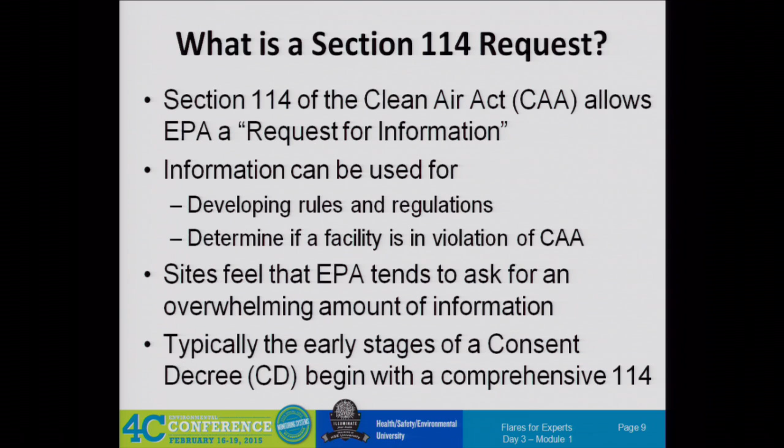We have seen sites where they submit their 114 response, and then they never hear back from the EPA. You're always wondering, are they okay with us? Were we not too bad? Did they find somebody else worse? They're looking for low-hanging fruit. Maybe you had a little bit of non-compliance, but not enough for them to expend all this energy to go after. Because they send out a lot of these, they probably found some more important facilities to go after. So there is a lot of uncertainty when you submit as to when or if you will ever get any response back from the EPA.

How to handle a 114 request. We like to say don't panic, but at the same time, don't wait. These come with a very specific 30-day time frame. That's just the standard. You'll get the letter, and it'll say, please provide all this information, and you only have 30 days. Usually there's about a week of time when everybody's just wrapping their heads around what we've just gotten in the mail.

They don't ask you, do you have a turnaround going on right now? They don't want to know that. They just know that you can drop everything and take care of this. So definitely get moving quickly. Involve lawyers. I know involving lawyers is always not a pleasant thing. But a lot of these things, especially if you have to create any calculations, or you're trying to investigate certain things, you want to be able to have that attorney-client privilege for those things that you're creating.

Pretty much look at the information being requested. They tend to fall into a couple of different categories. Usually there's a data portion of the 114 request surrounding your flare. There's a documentation piece where they want to know, give us any manuals, any design documents you have around your flare system. They're going to ask you for all your permits. They may ask you for all your permit applications. They may ask for emissions inventories.

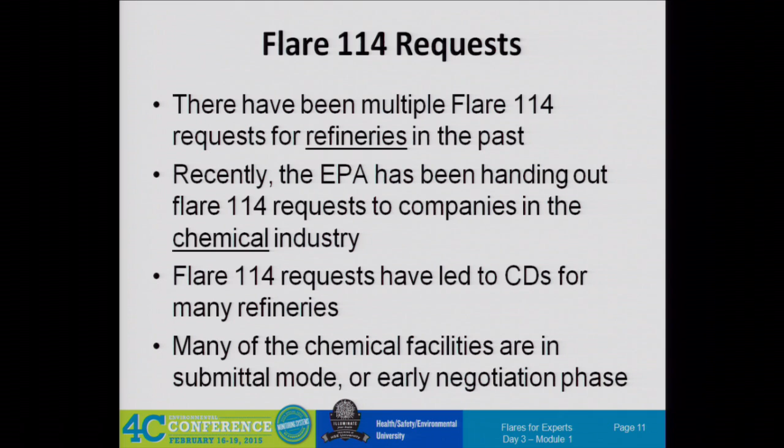Yeah, so, you know, it's moving forward.

A lot of different questions. The data side, it's pretty much verbatim between all the ones we've seen. They want to know the flow rate of the gases going to your flare. Usually it's about that 5-year window back, plus or minus. They want to know the volumetric and mass.

So if you already had like a GE Panametrics or something on your flare header, then that data is relatively easy to get. If you don't have a flow meter, you have to describe your monitoring of what you have on your flare system, and then they're going to ask for the data. If you don't have the data, they're going to ask you to estimate it. This is kind of how much work do you do to try to answer the question, because sometimes it's better to not give them information than give them poor information.

What average time do they want that data? Hourly, yeah. They will also ask for your assist rates. So if you have a flow meter on your steam, you want to get that data, but a lot of times people only have, hopefully, the valve positions for the steam in the DCS or the historian, so they could use a valve percent open to calculate steam flow. We see that a lot. But it is trying to get that data.

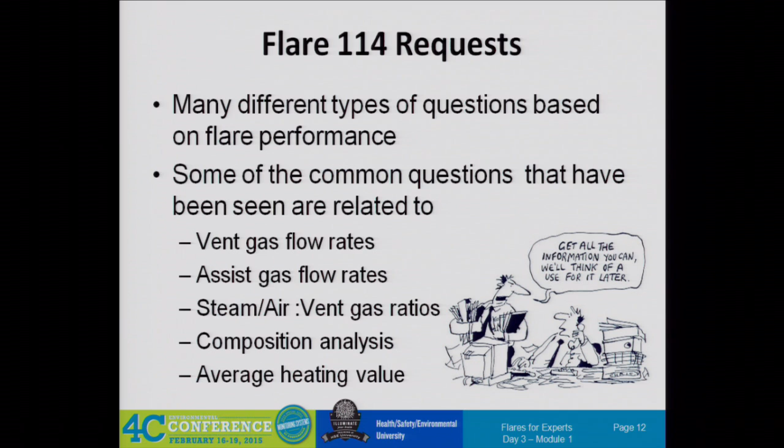The questions, they don't stop at the flares. There usually are some additional questions. Sometimes we've heard that it depends on how recently someone's been out to do an inspection of your facility. If they were out doing an inspection and they had some concerns about your tanks, there may be some tank questions in your

114. Almost consistently, they start to ask, do you have a closed vent system going to your flare? They're looking for that LDAR applicability to say, are you using that flare as the control device for LDAR? So that brought you into needing to comply with 60.18. So they want to establish what should you have been doing with your flare?

A lot of times too, and we think that it's coming from trying to justify minimization or installation of some sort of flare gas recovery, they ask for information like how much natural gas does the facility as a whole purchase, and then they ask of your fired sources, what's the fuel usage for all your fired sources at the facility. And we think they're just trying to create the argument that you've been flaring all these gases and you've been buying all this other gas. They want to be able to start that argument that, why don't you recover the gas that you're flaring and burn it instead of buying it? So they're asking for those type questions.

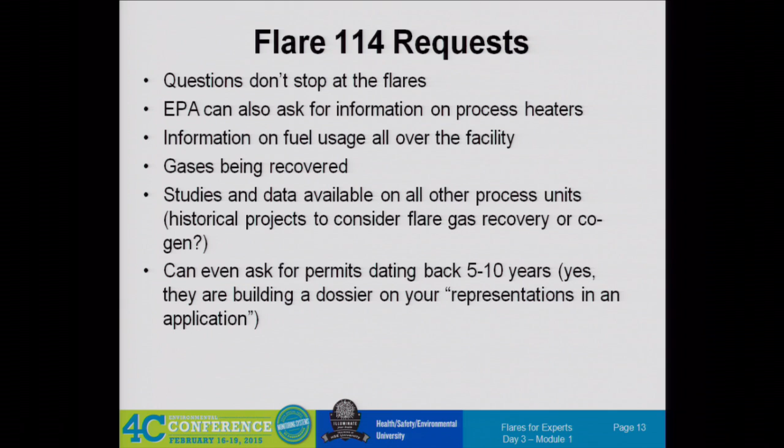Yeah, so this is a large effort. You're going to need to have some people pretty much dedicated to this effort, because you're going to have people going into the units a lot to get a lot of this information. Maybe you need to figure out what's actually going on with the flare. Or you're going to need people to go after different parts of the information. So that whole coordination of the effort to put together that single deliverable to the EPA can sometimes be a logistical nightmare with all the different data sets that you need. But there will be a lot of people involved.

Yeah, this is the other one: how do they want the data? They want you to provide the data in a nice Excel format, because they want to make it easy for them. They don't want to get a bunch of hard copies of data, so that somebody on their end would have to type all that data into Excel. They want you to set up the Excel sheet with all the columns with all the data, so it speeds up their analysis of your data. Also, any other documents they want in a searchable PDF document.

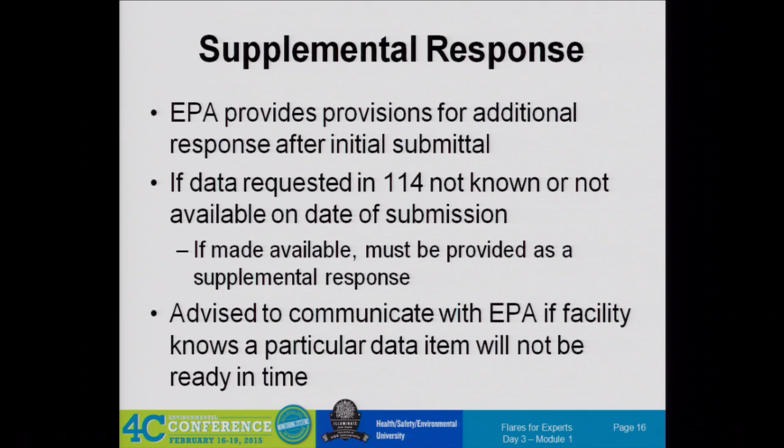Not so much. Yeah, we have seen multiple times where it's like, okay, you said that you didn't have a flow meter on your steam. It's been a year. Do you have one? It's kind of like, oh, did you guys put one in? So yes, they do want you to start making changes immediately.

We have seen, you provide some data. Sometimes there will be some very quick questions back. They got some data and they just need some quick understanding of what you gave them. They have looked at it and said, no, wait a second, is this or is this? And so some of these questions are just so they know how to handle that data. Other times they will start moving into bigger questions, sometimes asking you to now start sampling some of your flares, things of that nature. So if they take an interest, they could take a big interest in your facility.

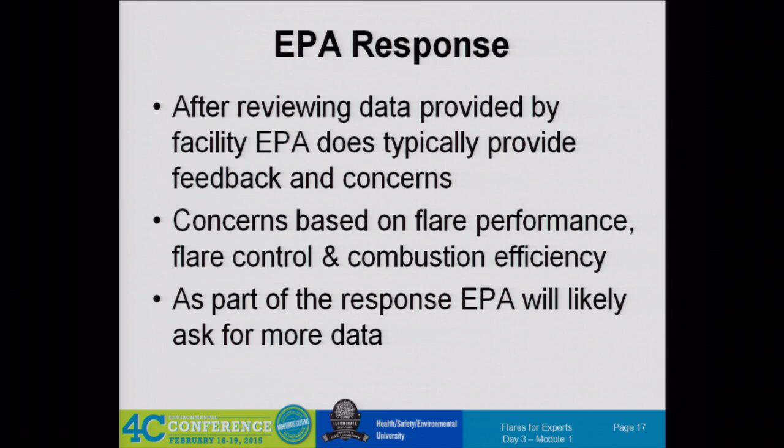And also as supplemental responses, usually when they give you a supplemental, they will ask then, please provide all the data since the last submittal. So they're going to be continuously asking for more and more data to look to see for these very changes. At least from what we've been seeing, the end game is relatively pretty much laid out. You see just within the consent decrees, we're all playing the same game but using different players. Everybody's going towards this. They want monitoring, they want control. So that end game is pretty much a given.

Now, when it comes to installing recovery and minimization assessments, that's when it's going to be a deeper dive into understanding, is it feasible? What are the issues surrounding that? But the end game with at least monitoring is relatively straightforward. And unfortunately, a lot of the time the end game is a consent decree. Other times we have seen the CAFOs come out, the consent agreement final orders. Those are generally seen as being better. But usually to be able to comply with one of those, you have already had to have started moving before they come to you. So if you're not already working up the engineering to install this monitoring and control, you're not going to be able to get done in time.

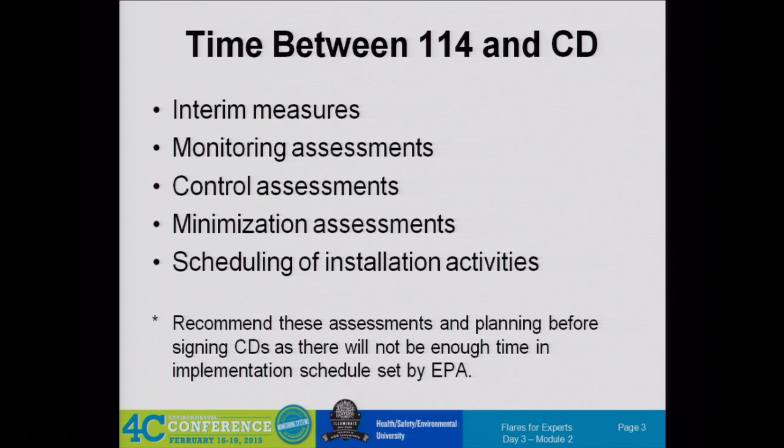Okay, I got ahead of myself.

Okay, the monitoring assessments. One of the things where we want people to try to be proactive is this: you did a 114 request and they asked for, say, composition data, and you have no composition analyzer on your flare. Now's the time to start looking at where a good place to put it is. What are the technologies? Start doing that evaluation. Are you at a site where they suddenly say, no, we hate GCs? Okay, well, what are your non-GC alternatives? Or if you say, no, we really like GCs, go and see what the options are.

Am I going to have to build a shelter for this thing? Some of those questions are some of the bigger dollar issues. So it's really about getting from what we need to actually doing the engineering studies. There are a lot of things you need to look at and evaluate, and it will help you understand what's going to drive the cost. Sometimes that's the best thing you can tell your plant manager: we've looked through all these different alternatives, and we feel that this package is going to be the lowest cost with the best data.

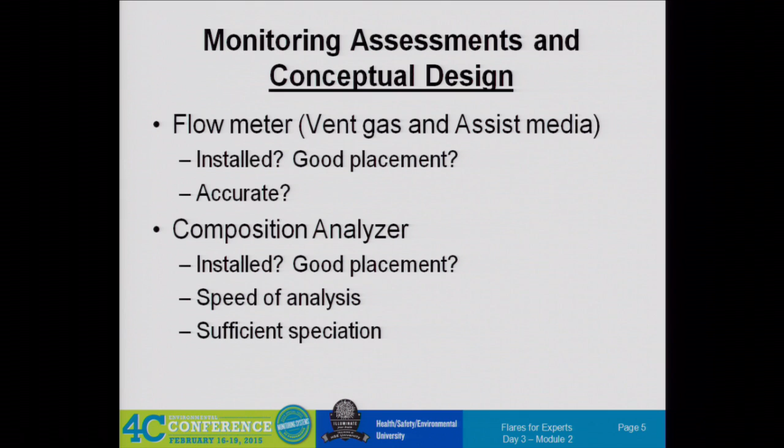Control assessments, especially steam and air. People have had these systems set up, and the question is, with the control system we have set up right now, is that going to be adequate? That's going to take some thinking about what's the quality of steam you get. Is steam going to your flare for reasons other than controlling for smoke? We've come across this at a couple of different places where sometimes the flare is the easiest place to get rid of excess steam. That's definitely something, but then of course that is another big project. So you have to think about these things holistically.

Checking out, okay, we have some ROs, we got our bypass ROs, are they still valid? Does anybody pull those things out and check to make sure? I think doing that evaluation to say that yes, that RO is sized properly and is providing that minimum cooling steam is a good thing to be able to show the operators so they can feel comfortable saying, I'm not going to burn up that tip if I turn the steam valve all the way to zero.

I think they have an uncertainty with that. We talk to the operators all the time, and you get that response of, you see the RO, you see the control valve, and they're like, oh, we always leave it at about 5% or so. We want it because we can't burn up the tip. You don't want to argue with them. We're not going to get into the details, but you're thinking to yourself, but you got an RO that should keep the tip from burning up. It's still in their mind that they got to keep that valve a little bit cracked just to keep the tip safe. So it's being able to show them, maybe somebody from their engineering group to tell them, no, you're going to be fine with just your RO. That could be a good thing for helping dial back that steam.

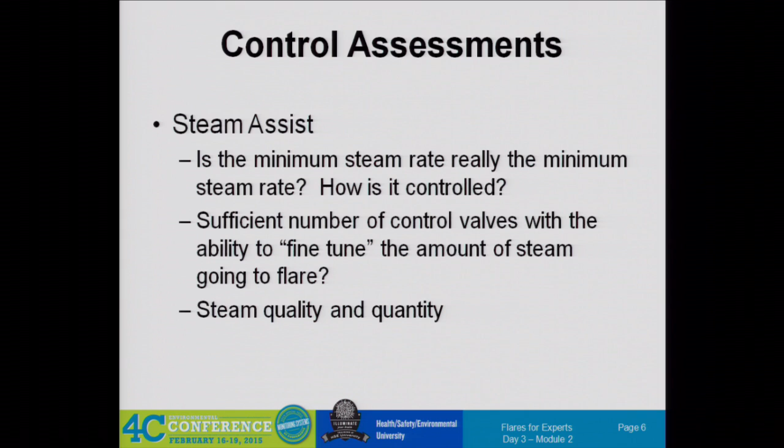Now keeping all these variables, how can there be a uniform way to do this? Yeah, I think all rules are trying to be written for every situation, but, you know, there's going to be high variability in these situations. But, all right.

When it gets to air assist control, it seems to get even more complicated. A lot of times you see an air assisted flare. Usually they aren't just single speed. Sometimes the blowers are single speed. A lot of times we see dual speed. If you're lucky, you have 2 blowers, so you have maybe 4 different speeds that you can add air at.

It's funny that air is similar to steam in that you still need to have some sort of minimum air going up in your flare, because you need to keep that upward velocity in the air plenum, otherwise you have the potential to bring down combustible materials inside of the flare. So you're always going to have some minimum air. Talking to some of the different flare vendors, they recommend having a small blower in addition to the larger blowers that provides that minimum upward momentum of air to keep the system safe, and then have your larger blowers kick in when there's actual flaring.

Everybody talks about the best, I guess, being variable speed blowers. We've seen 2 different types out there. One where the drive varies the speed at which the vanes are turning. We've also seen the variable vane technology, where the motor turns at the same speed, but the pitch of the vane is changed. I think the variable speed drive is a little more straightforward. The variable vane can be very complicated in that every different pitch on your blower has a different fan curve. So knowing the pitch and then finding how much air is coming from that, you're dealing with different curves, so it can get pretty complicated to get good control over that air.

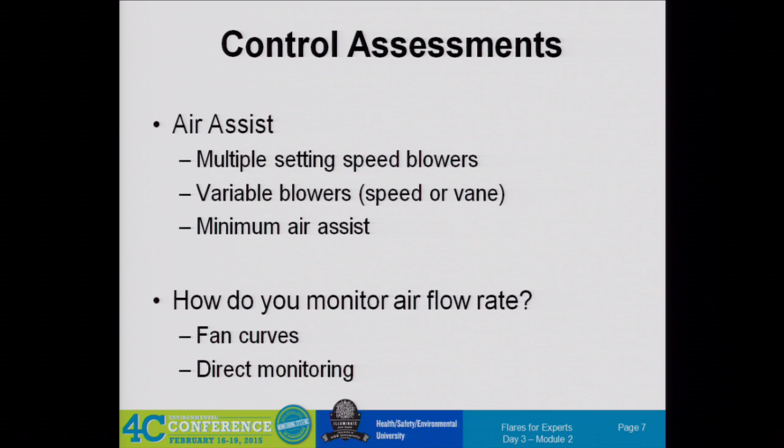Yeah, I think there's just going to be some more technical innovation that's going to happen with air flares. Pressure assisted flares all goes away. That's right. Put it in a ground.

Then when you get to more of the control side, so you've got your steam, you've got your air control. What else can you control? And that's your supplemental fuel. One of the biggest things we see is having a sufficient amount of natural gas out at the flare. That seems to be sometimes an issue. There'll be a little 1-inch line that's been run out there for the pilots, but if you want to add a significant quantity of gas, those lines are just not run out there.

And we always get that question of, well, can I just inject this extra gas up in the header? Like way back in the process? And we're like, well, you can, but that just means that it's going to take that much longer to see any result at the actual flare tip, and it's just going to mean you're going to be dumping a whole lot more gas into the flare because you have to overcompensate to get something to happen fast. Also, just quality and quantity of gas.

You know, when you do the calculations for how much supplemental fuel you need, sometimes it's a big pipe. I mean, it could be a 4-inch pipe. How big is the pipe coming into the plant? Even at the worst case, if you want to put a ton of gas there, is that much available, or are you just going to shut down the rest of the plant because you've just robbed everybody else of their fuel? So there is an analysis that needs to be done over how much gas you have.

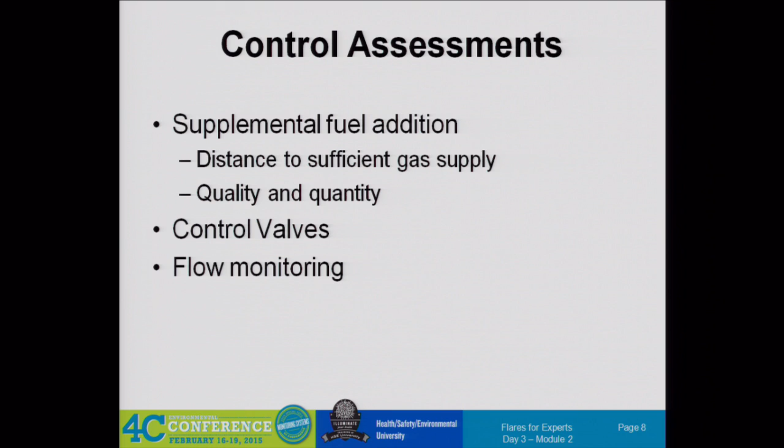Yeah. So it seems that there are ways to get the gas in there, but to be able to control it and limit it is really getting it as close to the flare as possible and of sufficient quantity. But then, of course, that has its own issues with control valves and flow monitoring. So it's another system that needs to be designed.

Then you get into just the control logic. I'm sure they talked about it on Tuesday. One of the biggest questions we start seeing is people saying, do we want to do all that in the DCS, or do we want to try to have some sort of external DAS that does it? Some people just say, no, if it's going to be doing actual control, we want it in the DCS.

Other people say, my DCS is maxed out. I don't want to have to put all these PI tags or all these tags into my DCS. But you can set up an external DAS that'll just output the few variables that the operator would need to know about to make sure that he can keep that system in control when it's not working right, but keeping most of the data out of the DCS.

Then it's just looking at keeping your system in manual versus automatic. I mean, that's a consent decree issue. And then the reporting is another reason for maybe moving towards the external DAS, just because the CDs will have a ton of different averaging periods. So you're going to need more raw, high frequency data, and then take that and post-process it to get all your reporting requirements. So it's definitely something that should be considered.

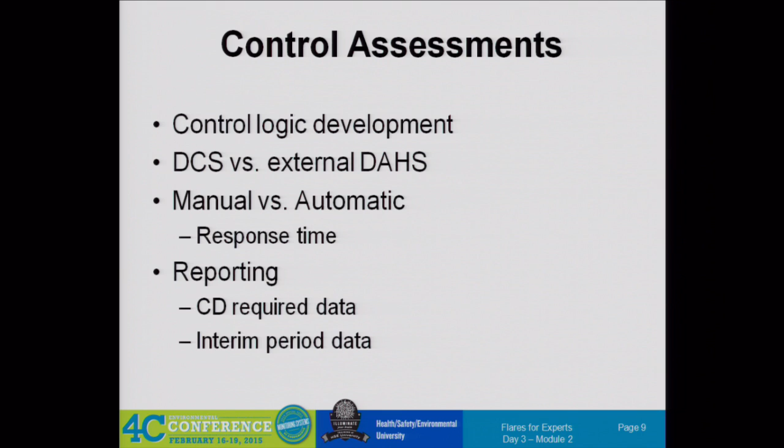Are there DAHS vendors that are getting into the flare business specifically? We've been talking to some. So it is an idea that's out there, and people are moving quickly towards that. DAHS stands for? Data Acquisition and Handling System.

Then the next thing is the minimization assessments. Generally, with the refineries, you're looking at whether or not you need flare gas recovery. On the chemical side, I think it's going to be a lot more complicated because it's going to be what types of gases are there, and what can we do with those gases? Are these gases suitable for your fuel system? That's a big question. You don't see a lot of flare gas recovery on chemical flares. I was talking to one of the guys from Zink yesterday, and he was saying that, like they said in their presentation, regulation was driving a lot of these flare gas recovery systems at refineries. He says it's because there hasn't been a big regulatory push with the chemicals yet to get those projects in. So maybe that will start changing as more and more of the chemical guys come to the party.

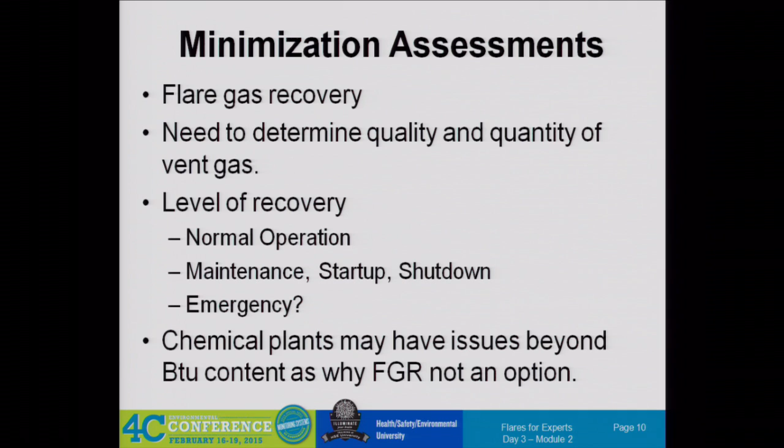Another thing to look at is at-source reduction. I think there can be a lot of work done here, just getting those flows out of the flare. One of the things we've come across through our work is people talk about PSV leakage. Do not forget about the bypasses. The PSV gets changed out every 5 years. Does anybody ever change out the bypass? Probably not. So there's sometimes a high rate of leakage for those.

Another place we see a lot, when we're doing our minimization assessments, is where some of the larger contributors are, and the next thing is looking at control valves. One of the big ones is on your fuel gas mix drum, with your purchased natural gas. Usually it's run off of a pressure control to back out the purchased gas. But there are plenty of sites we go to that say, well, we're long on fuel. And I'm like, well, are you buying gas? And they're like, yeah, we buy gas all the time. Well, why are you buying gas if you're fuel long? Is that logic set up with the controllers to back out the gas you're purchasing when you don't really need it?

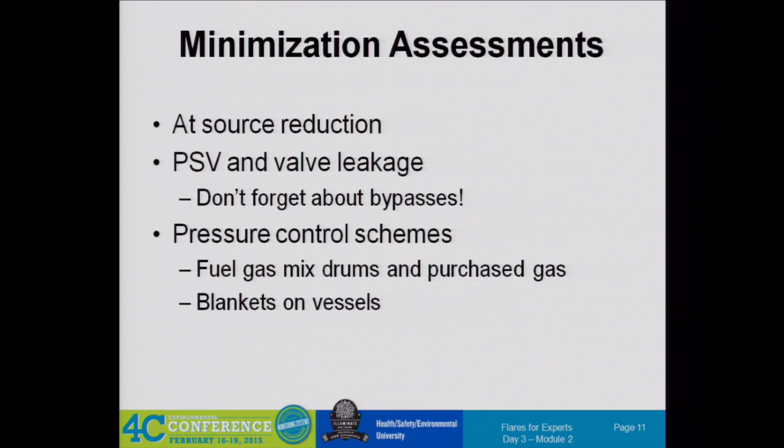Another one that we see commonly is the control scheme where you need to keep a natural gas blanket on a vessel. We've looked at the control valves and asked, why is this always going to flare? And then they go in and look, and either there's something leaking by the inlet control valve, so it's constantly adding too much gas that's overpressuring the vessel and sending it to flare, or the control scheme is not set up well enough, and they end up putting too much gas into the vessels on a consistent basis. So those are just a couple of quick ones that we come across more than most, I would say.

Scheduling. This is not a short process. You've got to take all these different things into account.

Especially if you're going to go flare gas recovery. Roger's going to talk about that time frame. Just the time to go through the other engineering assessments, the MOC process. Everything's got to be reviewed by everybody. So that's just going to make these time frames longer and longer. That's also why you need to start sooner and sooner, especially if you want to avoid a consent decree.

You cannot say, okay, well, for us to get through this process is going to take a year or two. Well, you may be beyond getting a CAFO at that point. So, I mean, it is start getting these processes moving.

And the other big one is the turnaround, especially when it comes into things like reworking your steam lines to your flare tip. That's likely going to take a shutdown of that flare. What is your schedule? Do you have one coming up in the next couple of years? What can you do now? Can you at least install the taps for some of this stuff?

When people don't like doing hot taps, do them when you can. Get those things into the schedule. You don't have to engineer the whole system, but at least get the taps engineered and installed when you can. That can save you a lot of time and potentially a huge amount of money.

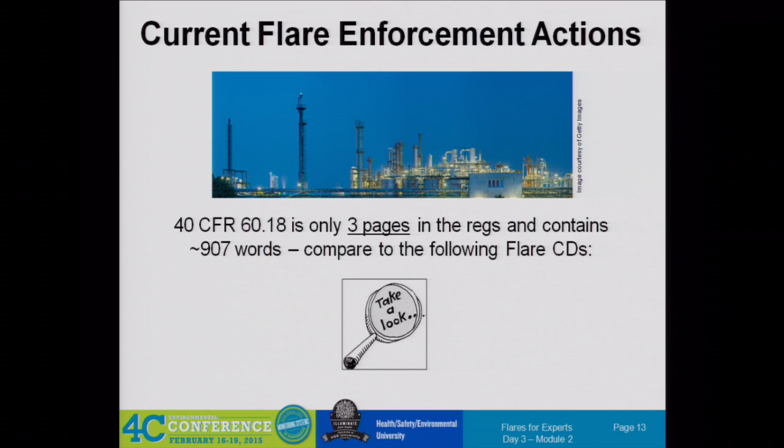Sometimes the dollars in the penalty isn't really reflective of how much money was spent by the facility. Sometimes they did a lot of work before signing the consent decree and getting a penalty in order to get a lower penalty. So those dollars do get spent. So it is an expensive thing.

Well, in the case of Marathon versus BP, I guarantee you that they did a lot of flare upgrades too. The cost of the testing that Marathon did that got them that reduction was nowhere near $7.5 million. So that money didn't get spent on testing. It could also be that good faith effort. If you're putting the effort in to try to solve the problem, maybe they back off on the penalty a little bit. So the testing wasn't in that $460,000? No, this is strictly the penalty.

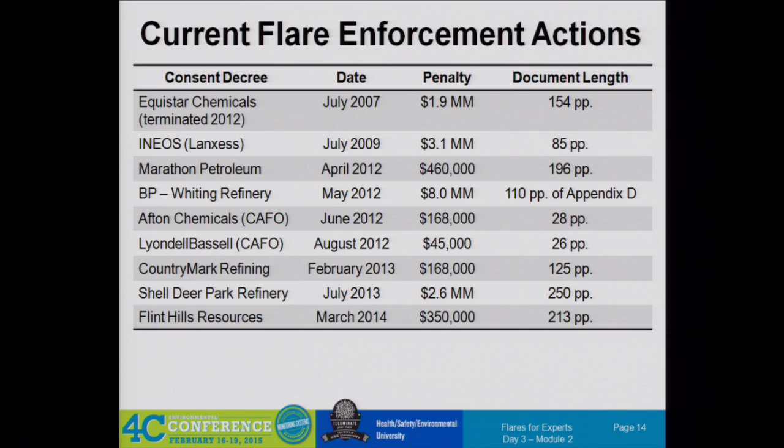Everybody's seen the consent decree. We know that they're all going to follow a basic structure. The two biggest components: one side is instrumentation and control, the other side is minimization. That's pretty much standard. And even at this point, the monitoring and control is getting pretty much standard. So it's more the minimization side that's going to be different. But each one has it.

Whether or not there's going to be combustion efficiency testing, I think we've seen that going away for the steam-assisted flares. I think it's for the air-assisted flares. If you have an air-assisted flare and you're getting into 114 or getting into consent decree discussions, you can pretty much think that they're going to ask for a test, just because they want to learn more about how you can properly operate that flare.

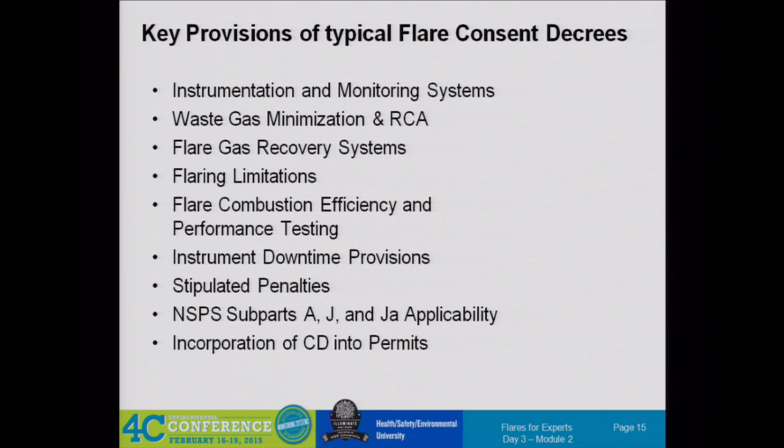Stipulated penalties, and the final one, the requirements, they live on forever. The last step to the get out of jail free card is, you didn't get out for free, but putting all those requirements into your Title V. So then, as we know, once you have something in your Title V, it generally stays there forever. So you get these requirements forever.

We provided these tables again. I don't know if there's anything specific we want to look at. It should be in the handout section. Looks like steam to vent gas ratio. Looks like they gave up on doing it on a volumetric basis, pretty much mass to mass. Everybody gets the combustion requirements. Exit velocity pretty much stays in there.

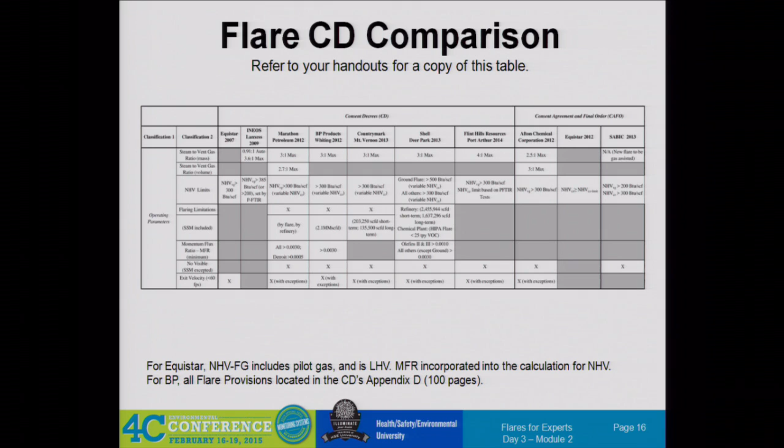Everybody's going to have to do the DCS logic to do the automatic control of supplemental gas assist. That's pretty much consistent, because when I start saying this is consistent, it's like saying, guys, this is where they're going. This is the end game. These are things that are not going away. So those are things you can focus on if you want to start doing things now.

The video monitoring, they went from only needing it if you were in manual mode more than 5% of the time. It seems in the last couple that recording of the images has become consistent, at 4 frames per minute. So that's coming to happen. You can see there that the performance testing isn't a constant. I know with the Flint Hills Resources one, they set a lot of their parameters based off of their testing, so that one's a little bit different. Everything else is nothing too crazy.

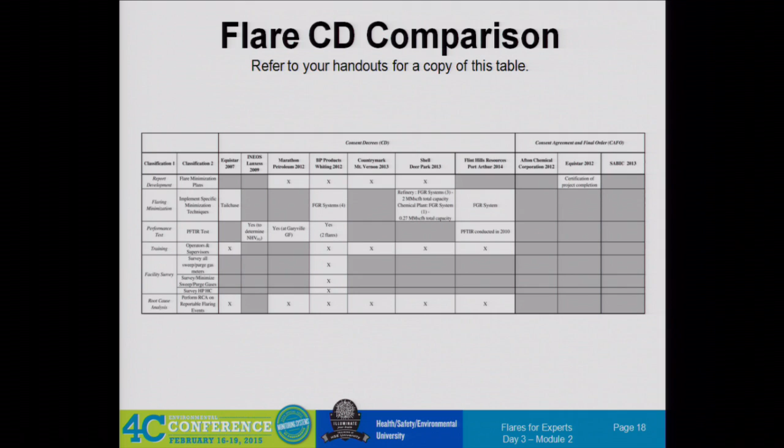Some of the things that, at least I find, add confusion: in NSPS-JA, you have a baseline. Then in the consent decrees, you have a base load, and these things are not the same. So now you're having to keep up with multiple things for different reasons. Everything's similar, but slightly different. And having these conversations, especially with people who aren't living this day to day, those words get interchanged back and forth, and next thing you know, everybody in the room is confused about what the person's talking about. So the words are important, and keeping everybody focused is important.

With the new proposed changes to MACT CC, we're starting to see a lot of the concepts that were in consent decrees incorporated, especially the net heating value and the lower flammability limit. With the earlier consent decrees, we had the net heating value and the combustion zone limit that was going away. So now there was a number to shoot for. That's a little bit better. But just be aware there is overlap.

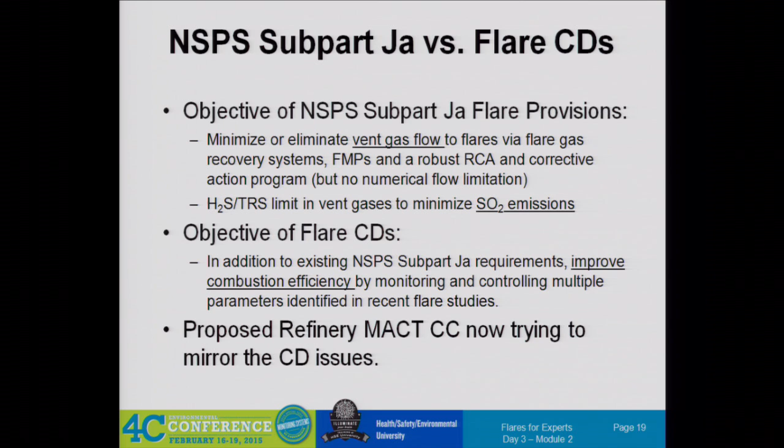Especially if you're starting from scratch and you need to install your monitoring, this is where you need to look at what your options are to maybe comply with both with one set of monitoring, instead of having a set of analyzers for JA and then another set of analyzers for MACT CC or a potential consent decree. There are some good overlaps in equipment, and there can be significant savings if you can limit the amount of monitoring you have to do.

This just shows that pretty much everybody requires monitoring. With the consent decrees, at least on the refining side, you're going to get a total flare gas flaring limit. JA doesn't have a hard limit, but it's above your baseline, and that's a threshold to do some more things. MACT CC did not give any sort of flow limit. For composition monitoring, with the consent decrees you're into H2S, organics, inerts. NSPS-JA is just the sulfur you care about, and MACT CC is just the organics and the inerts. So you can see the consent decree could cover all your different monitoring.

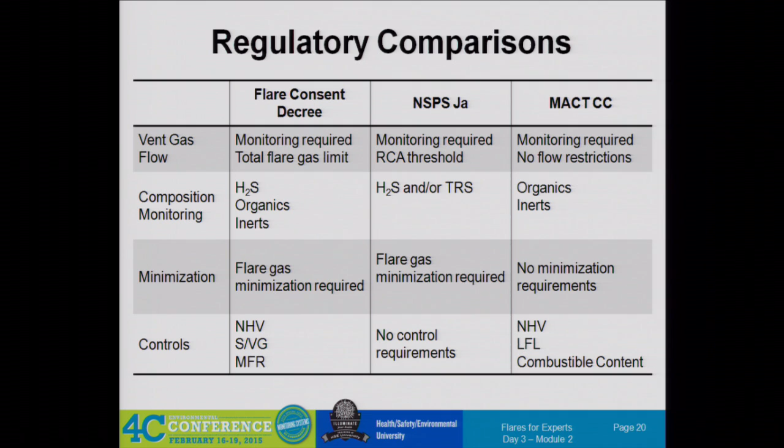Again, the consent decree and JA both had minimization. MACT CC did not. And for control, pretty much JA was the only one without, because you don't need to control combustion to control sulfur for JA. Okay, any questions?

Awesome. Hey, do we want to go switch back to the QA and Air Liquide, or do we want to move? Where do we want to put that in? We have 15 minutes until the first break. Would you like to take all of that? You want both of you to wait right after?

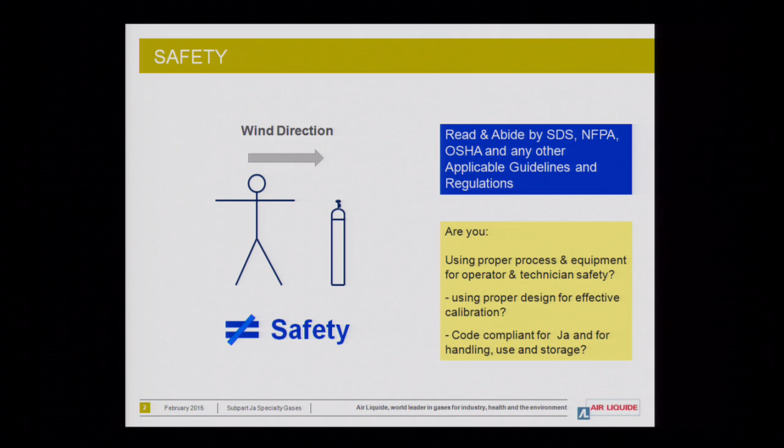One of the first things that really got us involved in this, what flagged us to the whole issue, is we had a couple of calls from people saying, hey, what's the highest percentage H2S that you can provide us as an EPA protocol? And we very accurately gave them the answer of 300 parts per million. It's typical for clients to call us and say, what can you do on this? What can you do on that? And then a day or two later, they call back for price and availability. In this case, Russell and I were comparing notes, and we didn't get a call from anyone. We'd had a few of these calls in the last couple of weeks, but nobody had the follow-up call.

So we called the clients back, and they said, oh, yeah, we didn't need to call you because we called somebody else, and they said they make 8% EPA protocols all the time. I don't know if you guys know, but pretty much by definition, the highest EPA protocol on a straight run is 300 parts per million. So this brought to our attention that here's another case where a regulation has been put in place, but not necessarily the infrastructure to support it. The EPA is asking you to monitor and calibrate systems at percent levels, but by definition an EPA protocol is directly traceable to a NIST reference standard, correct? Everybody's good on all of this.

That's great. Yes, I got it. Thanks for seeing that, though. I'm actually not out of battery. I'm pretty charged up. It's a good week, so. But dang, computer's gone.

And then other questions to just ask is to look at shelf life because it can vary. Especially once you get out of the area EPA protocols, EPA allows gases to be certified up to a certain period of time. It does not mean that all manufacturers certify them for that period of time. In a given class, they may only allow up to 1 year, 3 years, 8 years. You can find standards that are certified at all levels for up to 3 years.

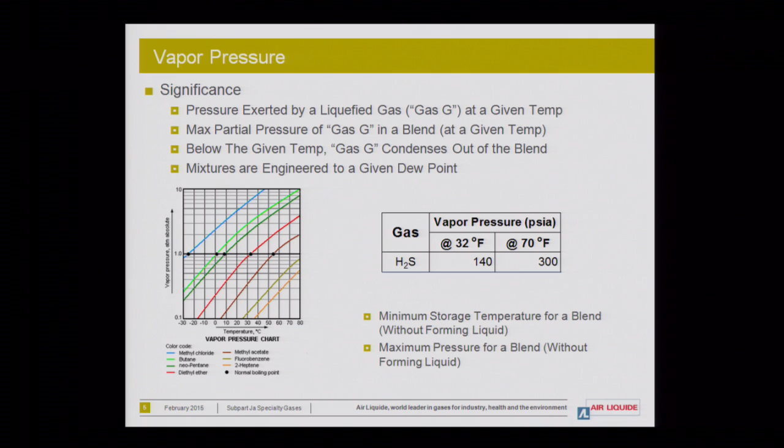A consideration to look at when you're doing gases, and this is one of the biggest ones that we've run into, is everybody familiar with vapor pressure restrictions on calibration standards? Because I don't want to explain it if you're not. Is anybody not familiar? Basically, the way I look at vapor pressure to simplify it is that it's a propensity of a solution to want to be in liquid versus gas form. So when you increase the pressure too much and lower the temperature, then it wants to fall out and be a liquid.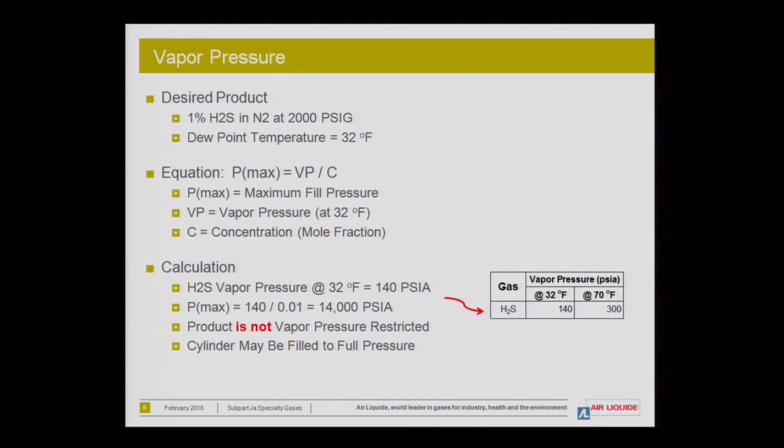And so you're trying to keep this as a gas that you're running to your analyzer for calibration. So in order to keep it in a gaseous state, you have to go through the vapor pressure calculations, and we use 32 degrees or 40 degrees depending on the gas and the composition as a measuring point. But for instance, in this case, if somebody's requesting, what is this, a 1% standard for H2S, we'd run it through all the calculations. We're putting it in a cylinder that's 2,000 PSI. It's okay to 14, so it's not vapor pressure restricted. This is chart information. Well, you've already got it shared, but we can go through more with anybody that's interested.

But when you go over 8% on H2S at 32 degrees, you start finding your vapor pressure restricted. And when you start getting to 20% and 30%, you become very vapor pressure restricted. Instead of having 140 feet of gas in a cylinder, you start dropping down to a third or a fifth of that level. And you get to the point that the pressure's so low at the vapor pressure restriction that you really might have enough gas to run a few dailies. And you start running into trouble, just depending on how your equipment's running and what your minimum pressure to your analyzer is. Here we're talking in the range of 30 or 50%, 500 PSI or 300 PSI cylinder.

And we had clients that asked us, well, calculate that at -10 because it could get really cold. And then this is what gives you the information that says, hey, we should probably put those cylinders in a blanket. Because there's lots and lots of research on hydrocarbons. If they do drop out of solution, it gets too cold, it drops out of solution, forms liquid. You can take a hydrocarbon standard, warm it up for 48, 72 hours, rotate it, and it'll come back completely into solution. It'll just homogenize back, everything's great. There is no research on H2S to that degree, on what it'll do. And we've done probably more research on H2S than anybody, but it's just not possible to get conclusive information yet on that. So it's something to consider.